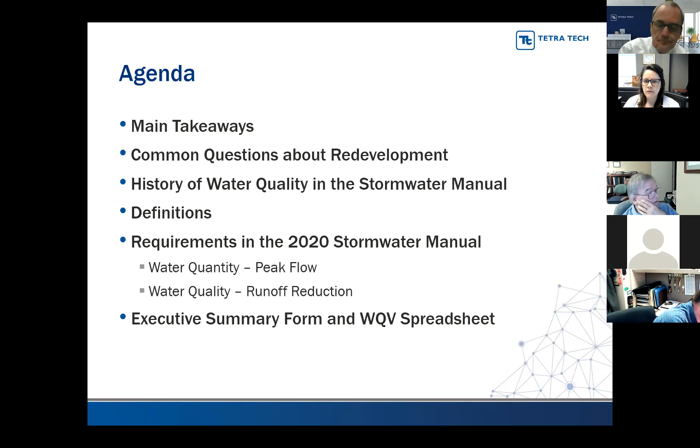From an overview regarding redevelopment in Fayette County, we typically have 20 to 30 projects annually. Half of them are usually less than an acre of disturbance. Many projects can meet the requirements by simply reducing the impervious area by 20%. The most common installed stormwater control is a manufactured treatment device. Approximately half of the projects are part of a larger common plan of development.

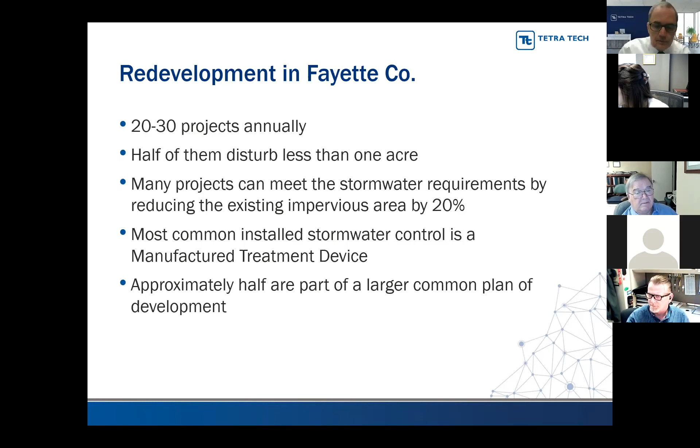So a couple of examples. This is Candlewood Suites on Waller Avenue, 2.6 acres of disturbance. They reduced impervious area by 6%. They didn't have to provide detention since the impervious area was reduced, and they installed a manufactured device to meet the water quality requirements.

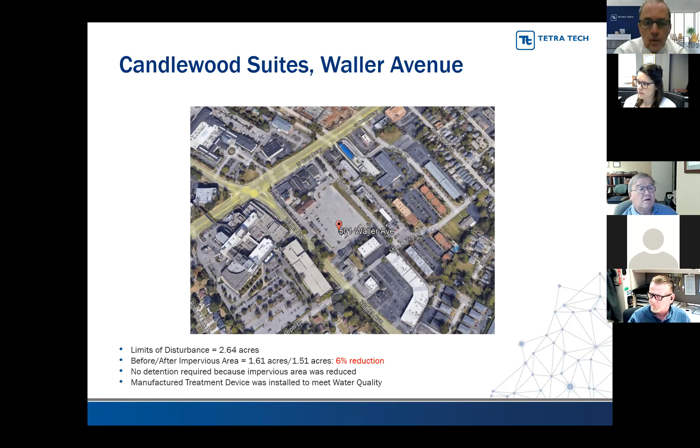Jiffy Lube on Meijer Way, part of a larger common plan of development, 0.9 acres of disturbance, so under that acre threshold that we'll talk about here in a minute. As part of that larger common plan of development back in the 90s, there was a detention basin put in on the other side of West Reynolds Road to control peak flow. So they didn't have to provide additional detention, but they did have to deal with water quality, and they did that by reducing impervious area by 23%.

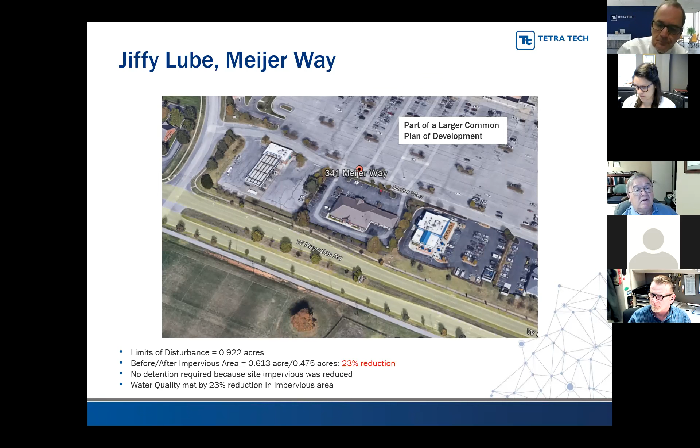So some of the common questions that have come up over the years: why does the city have water quantity and water quality requirements? I'm going to start with that one. We get this question a lot. Engineering gets that question a lot from engineers who are working from out of town.

The answer to that is really threefold. The first part is it's a requirement of the MS4 permit issued by the state of Kentucky that Lexington have requirements for water quality. Secondly, the consent decree required it. And thirdly, the citizens in the community expect it. So that's why we do it. Those requirements, many of them have been in place since 2001, so it's nothing new—it's been around a while.

These other questions will be answered as I go through my other slides. What is redevelopment? Does it apply to remodeling? What about sites less than an acre? Does it apply to water quantity? Are stormwater controls required if there is no increase in impervious area? There's a lot in the manual about water quality volume, runoff reduction, the 80th percentile and 90th percentile storms, so we'll talk about that. Item 9 is kind of a related thing, and we put it here because it comes up quite a bit regarding parking. And then, what is a common plan of development?

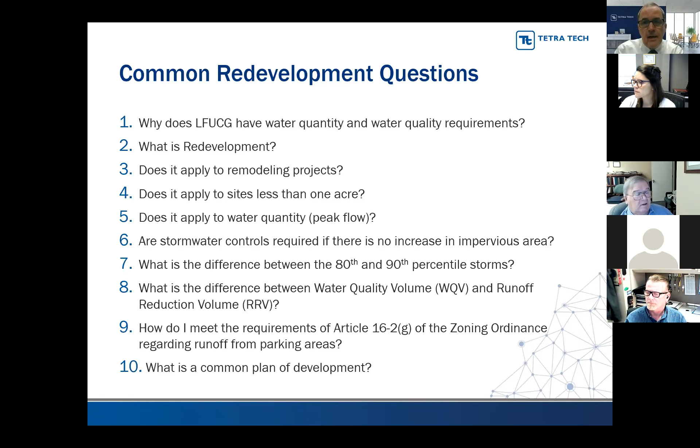So the main takeaways that I would like you to remember—if you remember nothing else from this presentation, I'd like you to remember this. There's a lot on this slide, so I'm going to spend just a minute on it. Stormwater standard for redevelopment. By the way, Abby, can people see my pointer?

Yes, they can. So water quality is for projects that disturb 1 acre or more of land, or that are part of a larger common plan of development. It's to control all runoff from new impervious areas—that is the same standard as new development. It's to control 20% of the runoff from existing impervious area, and the purpose of that is to achieve incremental improvement over time, and also to provide flexible standards that don't inhibit redevelopment.

And then with regard to peak flow, again, control all runoff from new impervious areas, and that is the same standard as new development. I also want to point out that engineering may require additional controls when there have been reports of flooding downstream.

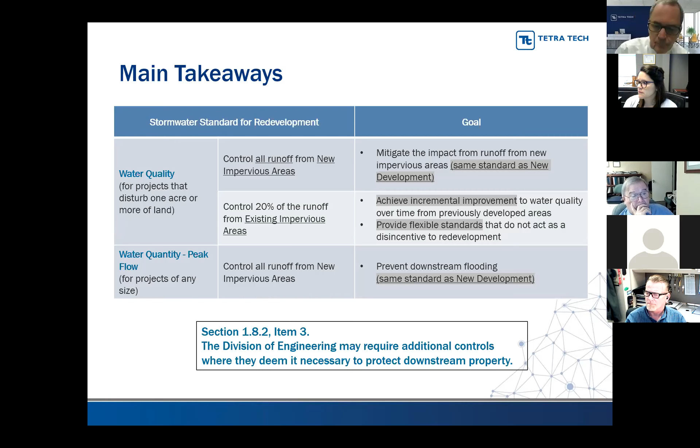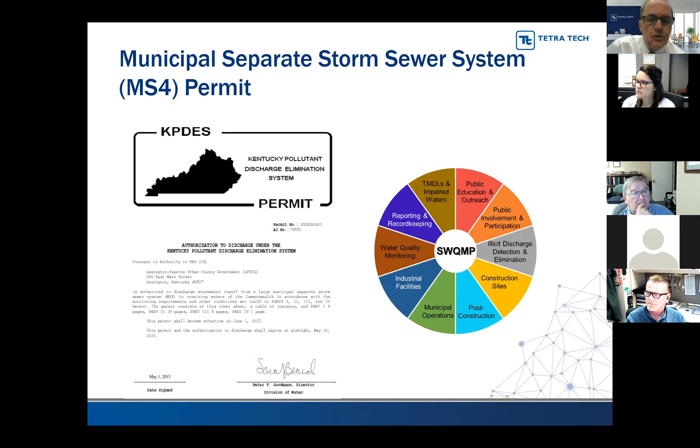As I mentioned earlier, new development and redevelopment requirements are part of the MS4 permit, the Municipal Separate Storm Sewer System. The permit was issued to Lexington in 2015, and requires the city to have a stormwater management program. I'll make the point that the Division of Water has noted in their response to comments that the city's post-construction standard is the same as other MS4s in Kentucky, and that the 80th percentile event, they deem it to be the maximum extent practicable for Kentucky.

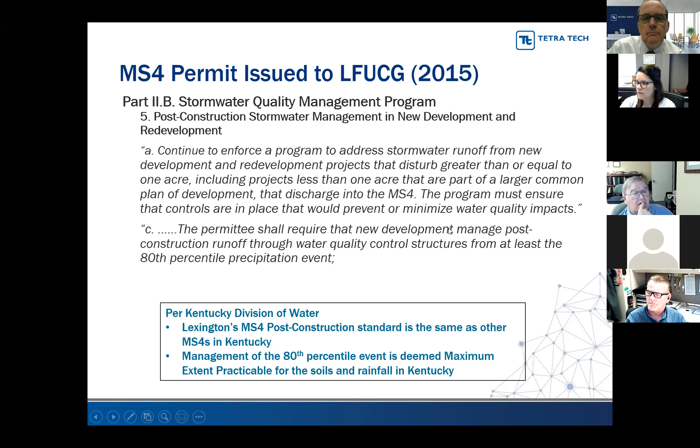So a little bit of history about water quality in the stormwater manual. The manual was adopted in 2001. In 2004, redevelopment standards were added, and really that's been the same ever since. In 2016, green infrastructure requirements were added to reduce the runoff volume.

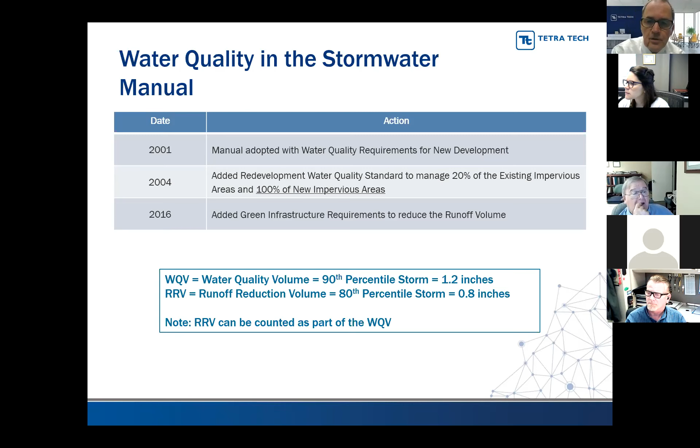At the bottom there, you can see information about the WQV and RRV. The 90th percentile storm is 1.2 inches. The 80th percentile is 0.8 inches. You may be wondering, where does that come from? We'll talk about that here in a minute.

So this chart is out of the stormwater manual, and it shows the requirements for new development on the left and redevelopment on the right. Just a few things to point out: the water quality volume is 1.2 inches, runoff reduction is 0.8 inches. And there is a requirement for channel protection to minimize stream bank erosion by providing detention for the 10-year, 6-hour storm.

And then for redevelopment, no detention is required if the impervious area is not increased, because there's no increase in peak flow. The requirement is to reduce baseline impervious area by 20% where possible. When they can't do that, provide other stormwater controls. And to emphasize the point, if there's a net increase in impervious area, the new development standards apply to that.

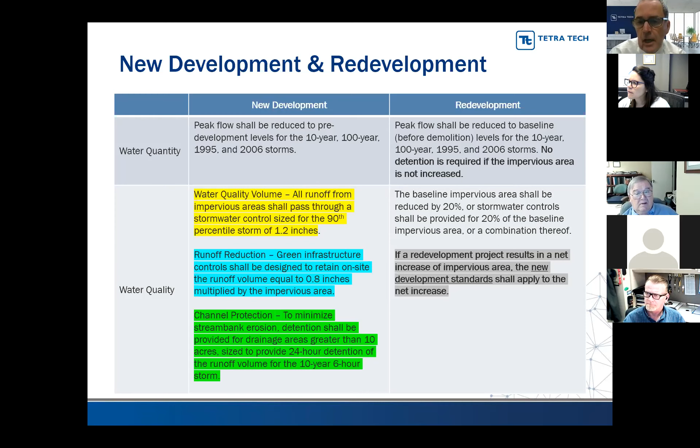So I'm not going to go into the next 3 slides in great detail, but this is out of the manual as well to show the typical applications depending on the date of original development.

So typically before 1974, there were no detention basins, no water quality controls. Then the requirement is to implement controls for both detention and for water quality.

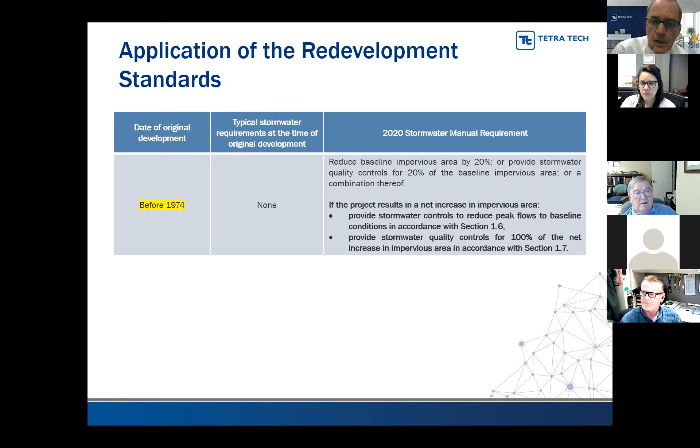Between 74 and 01, typically the only stormwater management facility was the detention basin. There are a few cases where there were some water quality controls, but it's primarily detention basins. So then the water quality requirements apply.

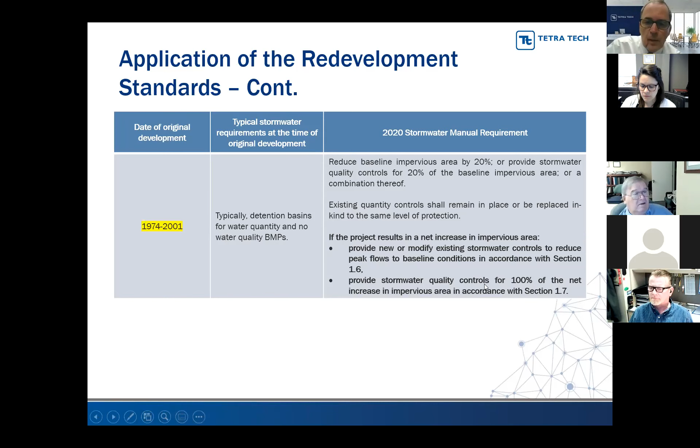And since 2001, we've had both detention and water quality controls.

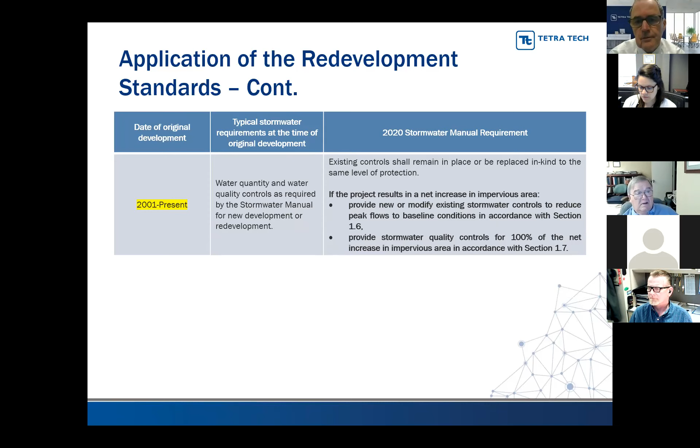So fundamentally, the requirements for redevelopment are to first manage 20% of the baseline impervious plus 100% of new impervious, and provide green infrastructure for new impervious areas to reduce the runoff volume.

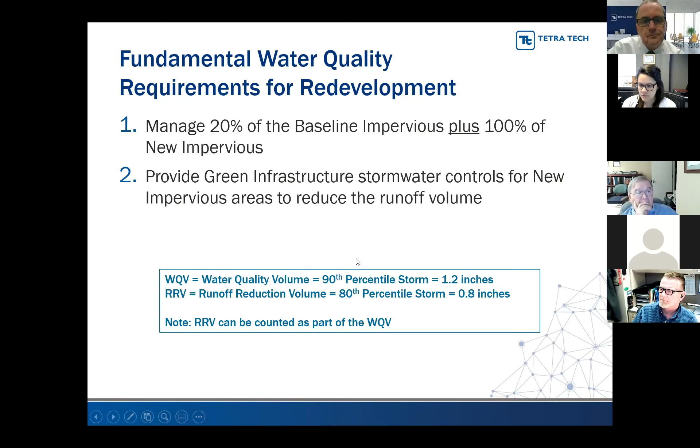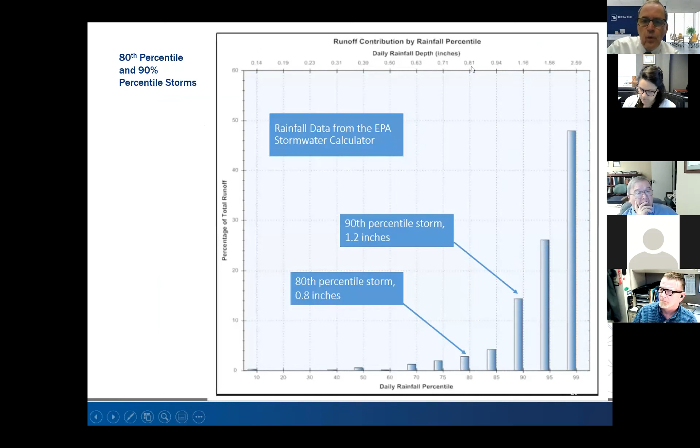Key definitions, again, this is out of the manual. We didn't come up with these, they are EPA definitions. Redevelopment is something that changes the footprint of a site, a disturbance equal to or greater than an acre. It does not include remodeling.

And then the larger common plan of development or sale is probably the most common topic of discussion. It's a lot of words there to define it, but it's not always clear cut. So there's a lot of discussion that goes on many times about whether a site is part of the larger common plan of development.

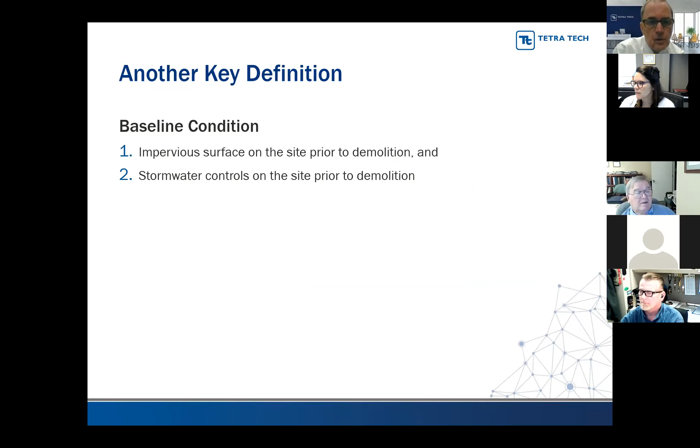Another key definition is the baseline condition, which is two things: the amount of impervious area on the site prior to demolition, and also the stormwater controls that are on the site. And there is the list of available stormwater controls listed in the manual.

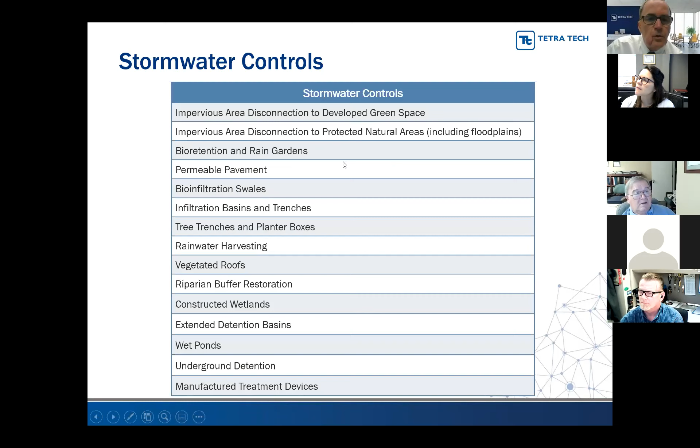In terms of the flexibility that a developer has, it's to first try to reduce baseline impervious by 20%. Secondly, provide BMPs for 20% of the baseline plus 100% of new impervious, or a combination of the above.

So there are several scenarios that you can see on a redevelopment project. The most common is that there's a decrease of impervious area somewhere between 0 and 20%. And then the developer has to provide additional controls for that remaining 20%.

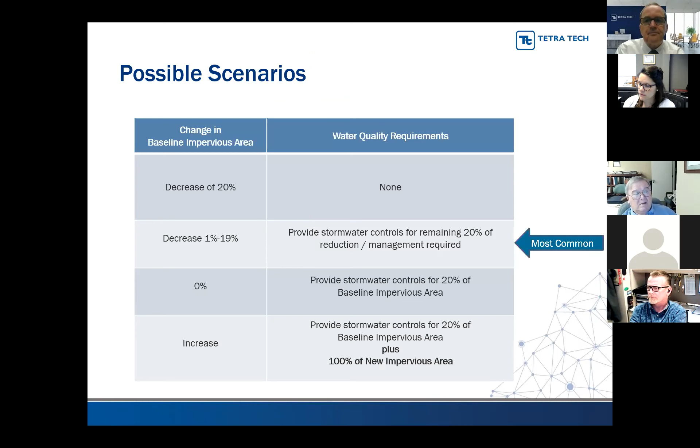Parking areas, I mentioned earlier, this is out of the zoning ordinance. Whenever there's a project that is adding 1,800 square feet or more of parking, there has to be a stormwater system in place to handle that additional flow. So engineering deals with that on a case-by-case basis.

Manufactured treatment devices, I mentioned that earlier. They can be used on new development and redevelopment when green infrastructure is not technically feasible. So what are some examples of that?

Many times in a redevelopment project, the infiltration rate of the soils is less than 0.5 inches per hour, so green infrastructure just doesn't work very well. That has to be demonstrated by a field test.

Sometimes there are elevation constraints. Subdrains cannot discharge to the surface, so green infrastructure that uses those will not work.

If the site is in the Royal Springs Aquifer, there's sometimes a concern about potential contamination due to an oil or gasoline spill. The geotechnical report may indicate a karst area, so green infrastructure is typically not a good idea in that case.

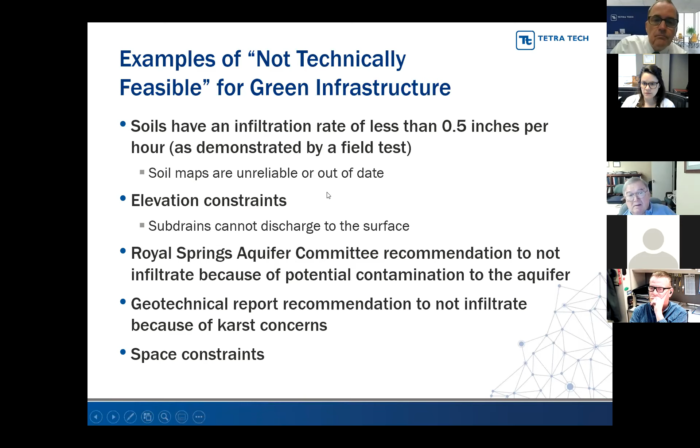So how are we doing on time here? 9:25, okay, so a few more slides here.

This is the executive summary form that the engineer fills out to demonstrate compliance with the things we've just talked about.

They also fill out a water quality volume spreadsheet. Here's a hypothetical example of adding 20,000 square feet of impervious surface. The spreadsheet calculates the water quality volume and also the runoff reduction volume.

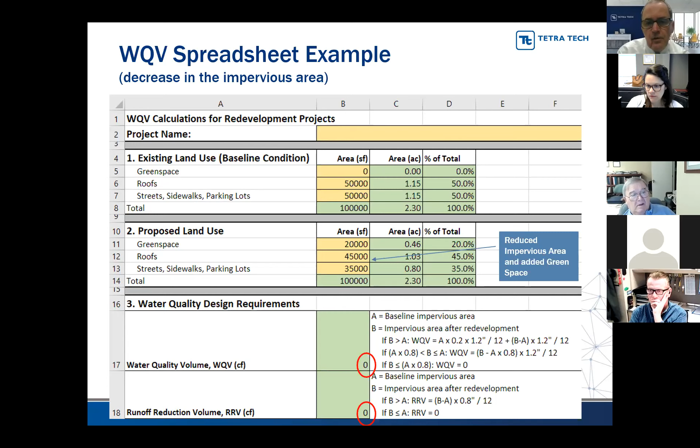And then another example where impervious area is being reduced by 20%. The spreadsheet again calculates the water quality volume as 0, and the runoff reduction volume is 0.

Okay, that finished up my part. Abby, what questions do we have? I don't see any in the chat yet, but feel free to unmute yourself. Richard has a 3-question rule, so let's help him meet his quota. Surely there's a question or two.

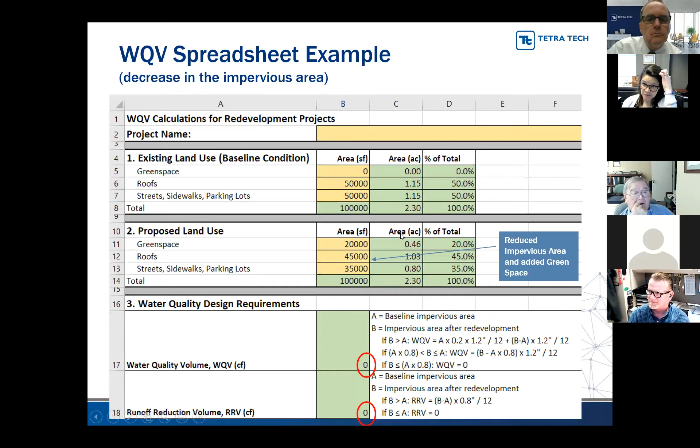Well, maybe not, maybe everybody's getting ready to go on spring break. Richard, can you expound a little bit on the slide where you were talking about a larger common plan of development? Maybe give an example - you had talked about it being a challenge, but I was curious how that's normally determined.

Well, sometimes it's - I think the confusion primarily depends on the original development of the property. For example, we mentioned Meijer, the Jiffy Lube there on Meijer Way, which is next to the Meijer store on Reynolds Road. That was done back in the 90s, before the manual was in effect. So typically that would be, and that is, a larger common plan of development. You had the big grocery store, you had the lots there with Jiffy Lube, a bank, a restaurant, and so forth.

But sometimes with things that are older or newer, it can become confusing about whether the outlots were really part of that larger common plan of development, or were just a single parcel that got sold for a specific purpose. Does that help?

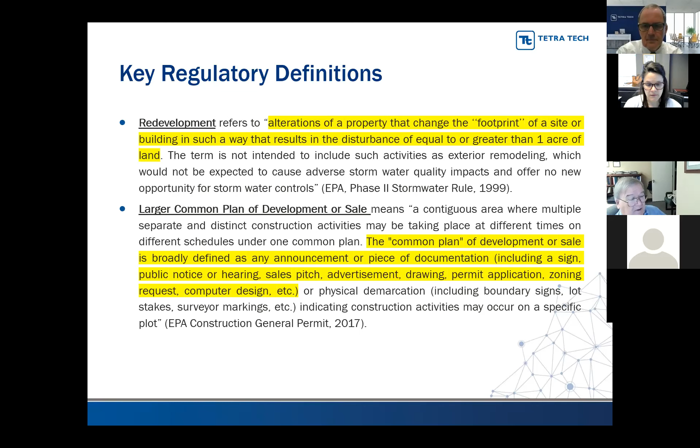I think the intent is commercial, but we see, especially with some of these mega homes that get built on lots that were previously not mega homes, you may actually see an impervious increase from that. That wasn't the intent - it's one of those things where it doesn't really have a spot, we're not sure where to put it yet. Richard, if that's what you're referring to here.

Richard: Yes, didn't this evolve out of discussions 20 years ago when all of the conversion of single family homes to student housing up around State Street, Elizabeth Street started going on - areas that had some drainage problems - and then all of a sudden you've got 8 college students living in a single family house, and they created some additional parking around them to accommodate their vehicles. I think that's where it came from, wasn't it? Yes, that's my understanding. It started because of UK, property around UK getting converted to student housing. Many times there was not an adequate storm sewer system in place to handle it, so it may have already been a problem to some degree, but that made it much worse. So that was the reason why this article was put in place.

Okay, thanks. Hey Richard, yes it's Fred. How you doing, by the way? Good. How are you? Great.

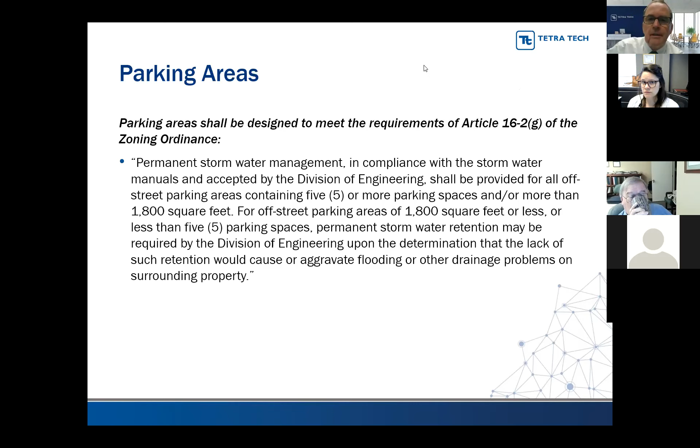All right, give me one second here. Do the old 'can you see my screen' question. Can you see my screen? We can, you'll probably want to do slideshow or presentation view. Yeah, I was just making sure I had the right side to start with. Yeah, there we go. I know you can see it because I can see it.

All right, so I'm Doug Burton, Director of Engineering. I think most of you know me. Sorry, I'm gonna interrupt you, can you switch sides, display settings, and then switch? Yep, yeah, that's what I was wondering. There we go. Perfect, I didn't have any notes there anyway. There you go. All right, so most of you know who I am.

So today what I wanted to focus on is, since it's redevelopment, often we see that being done by folks who maybe are new to the area. So we wanted to focus on the problems that we see—not to beat up on people, I feel like that's what this feels like sometimes, but it's just common little problems that cause delays in development, especially in redevelopment. If we can get ahead of these beforehand, it expedites the schedule, because we get calls all the time from developers or financiers saying, hey, what's the problem here? And we say, well, we're still waiting on X or Y or Z. So I wanted to cover some of those things today and help folks in the development community avoid those delays, because time is money.

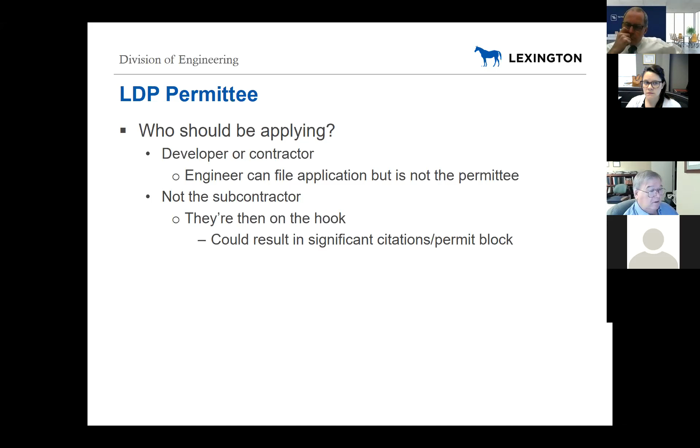Which can obviously get you citations and financial penalties, but also could get you permit blocked like they were before. So just make sure you're not working with someone who's trying to end around the system, because in the end we're probably going to find out, and it's just going to bite you in the butt.

We tried to make it a catch-all, but you can't catch everything, so we understand there's always going to be instances where there's something we missed. You may go through this entire thing and not get your question answered - fine, give us a call. But odds are most of your questions could get answered by simply walking through this process. If you find a massive hole in it, let us know and we can update it.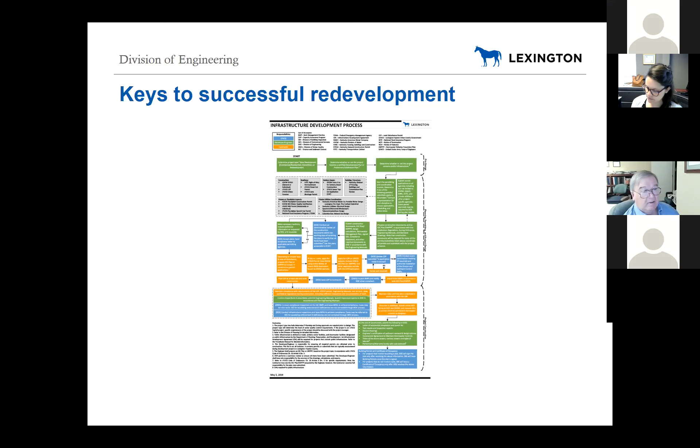Again, more keys to successful redevelopment: make sure you're turning everything in complete. That's probably one of the biggest things that creates delays - people not turning in forms, or turning in unsigned and undated forms that we've updated 2 or 3 cycles ago. We'll see forms that are 10 years old. And finally, probably one of the more important ones, make sure you fill out the executive summary accurately and completely, because that gives our reviewers a 10,000 foot view on everything you're doing, which can really expedite their review process.

Another thing that happens in the redevelopment sphere is people think, well, it's under an acre, I don't need a permit. Yeah, you do. You might not need an NOI, but you still need a permit from us. So keep that in mind if you have one of these smaller sites.

Next, erosion sediment control. One problem we've seen is that a lot of engineers have been doing work in this town for a long time, so they know how the process works. So they know if they notify us, we're just going to notify DWQ. So why don't we just skip a step and notify DWQ directly?

Well, the problem with that is twofold. First, it means the people who are controlling your permit, which is us, don't know where you're at in the steps. Also, it means you might be notifying the wrong person. If you're notifying one of the inspectors you've always worked with, they may not be the one assigned to this project.

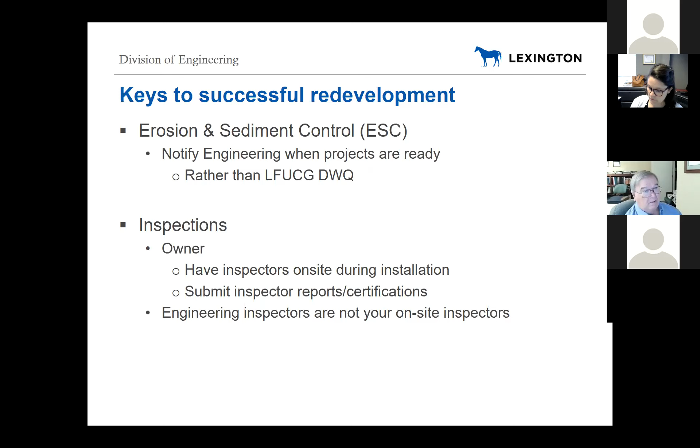Next, we'll move on to sureties. One problem we see here on surety creation is that we need to be there for that process. So get with Vaughn Atkins, who's our surety person, and she and one of the inspectors will do a walkthrough to make sure that both the engineers providing those surety calculations and us are on the same page.

And what that helps to do is avoid confusion when we're trying to remove items from the sureties later. So if you did something that we wouldn't have agreed with later, then it's just going to cause hassle. So make sure everybody's on the same page, do a walkthrough, make sure we're in agreement on that surety creation.

And then it just simplifies everything after that, especially when you consider some of those items may be 2, 5, 10 years down the road. If everybody's on the same page on day one, it's a lot easier than trying to remember what everybody was thinking 10 years later, 5 years later.

And then the one that causes some of the biggest issues is sanitary sewer issues. Get those fixed ASAP. Those have a 3-year inspection. So if 3 years down the road, you've already got the CO and there's people in, let's say, an apartment, and you've got some sort of major sanitary sewer issue under that parking lot, and it's found during one of that 3-year inspection cycle, you don't want to rip it up then because you already have people living there.

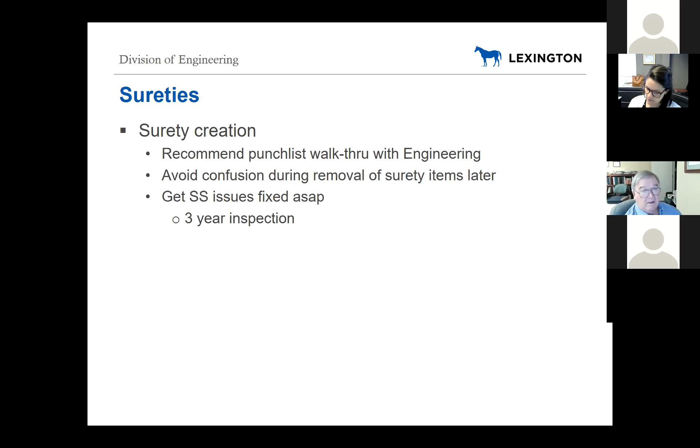So make sure that it gets fixed before you really occupy that. Next, maintenance agreement. This is one that for a lot of those, since it's redevelopment, then you may see sometimes. And again, examples of that are the basins, the underground storage, pavers, the manufactured treatment devices.

And what's the purpose of this maintenance agreement? It defines the inspection and the maintenance, basically what's to be done and when, and then who's responsible now and later, because obviously that changes. Who's responsible now is typically the developer. Who's responsible later is probably going to be the HOA or somebody to that effect.

So what we've seen is that isn't well defined maybe in the initial maintenance agreement, and then 5 years down the road, the HOA says, I didn't know I was supposed to do this. So if we get the maintenance agreement clear on what's going to be done and when, and who's responsible for that, it greatly simplifies things.

So how do we play a role in that? Well, engineering's role is that we're there on the front end, helping with the design and construction review and making sure it's in compliance with our standards and regulations. And then we turn it over, when it's complete, to DWQ, and they're there for the yearly inspection and regulation.

So one thing to keep in mind, that maintenance agreement form, the one that's online right now is a little out of date. It actually still has Jennifer Carey's information on there. We've updated it with Lindsay's information, but we haven't put that on the website yet because we're going to put some other updates up there as well.

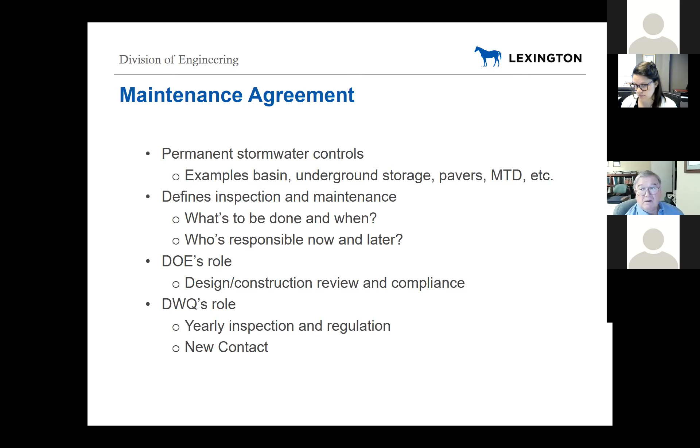So if you have one where you're going to need that, just reach out to us, Josh. More often than not, if you're doing redevelopment and you're doing one of these devices, it's probably commercial. So reach out to Josh Desarney, and he can provide that information. So with that, any questions?

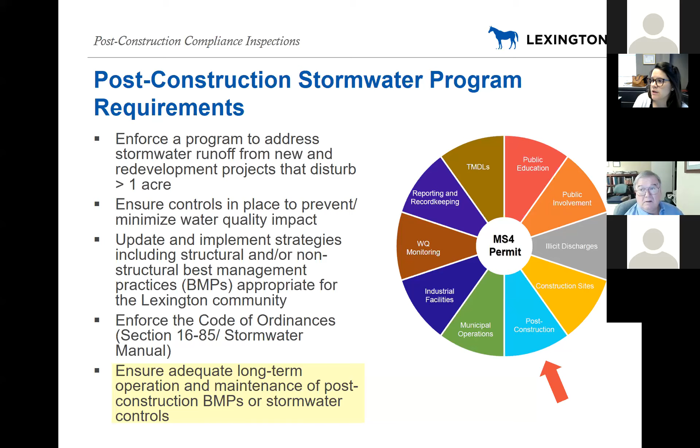So when we look at that requirement, what we're doing here and how do we do it? This slide's all about the how, you know, keeping an inventory of everything in the city. And we'll get into some numbers later, just so you have some background on that, maintaining procedures and checklists for how we're going to do compliance inspections of all these stormwater controls that have gone into the city.

Completing the inspections themselves, implementing repairs that fall under LFUCG's responsibility, implementing a program to ensure that private property owners conduct or arrange the repairs or maintenance that needs to be completed, having some sort of enforcement plan, our enforcement response plan that we follow for following up when repairs aren't completed or we need to escalate in some manner.

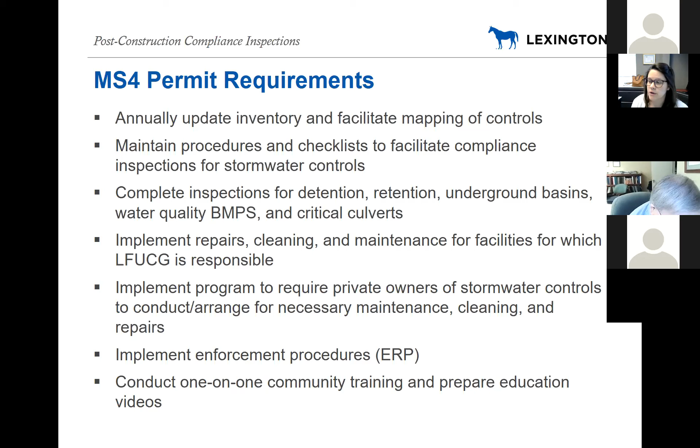And then also just doing one-on-one community training with folks as we go out and do the inspections, meeting with property owners where possible, trying to have that conversation first. And then we also prepare education videos each year, kind of bouncing back and forth between construction and post-construction. So we have a link to that later that I can pull up.

So when we're talking about stormwater controls or BMPs, Richard kind of mentioned this briefly, but there's the list of your stormwater controls in chapter 10 of the stormwater manual. For the most part, your stormwater controls are infrastructure designed or constructed to meet the water quality or water quantity requirements that Richard mentioned at the beginning.

So when you're talking redevelopment, it's that 20% reduction, and if you do that through pervious pavers, or if you don't hit the reduction and you're needing to install some sort of water quality or quantity device, then that's what we're talking about here.

And just a note on this: as you're in the design phase, one of the things to note that we deal with on the post-construction side of things is thinking about O&M and what those O&M requirements are during the design phase. So in particular, providing access, noting where the outfall is located and that it's not outfalling onto someone else's property without the proper controls, noting what's draining to it and how that may affect the BMP, or how it could inhibit pollutant removal, things like that.

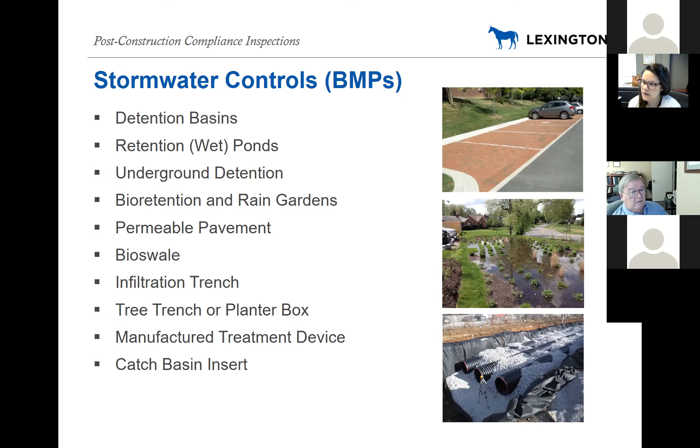So Doug mentioned the maintenance agreement and just some things on our end, and how that process and transition works. Once construction has reached substantial completion as defined in the procedures manual, then we, being the Division of Water Quality MS4 section, our inspectors will complete an inspection.

We'll get a list of those projects and we'll complete an inspection and ensure that that control is completed with no issues, that it appears to be functioning as designed. And at that point, we look and make sure we have this maintenance agreement.

We use it as a basis for our inspection, and this is filed with the BMP so that we have it for all future inspections and have the contact information, and what we need for the procedures or any sort of maintenance information that we would need. At that point, if it looks like it's functioning as designed and it's at substantial completion, then we'll add it to our inventory for long-term maintenance inspections. We'll get into how often those happen in a couple slides.

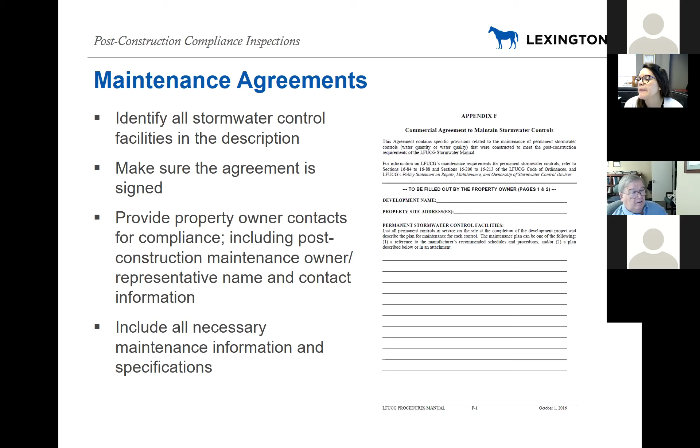So just some quick notes on the agreement itself. From our side of things, make sure you're identifying all of the stormwater controls on the maintenance agreement. Sometimes we see different ones missing and have to go back, and then engineering needs to go back to you and then back to us. So if you fully complete it and there's no issues, you avoid the back and forth. Make sure it's signed, provide the property owner contact for compliance, specifically the post-construction maintenance owner and representative name and contact info, so that if we have issues, we know who to contact. And then include all necessary maintenance information and specifications.

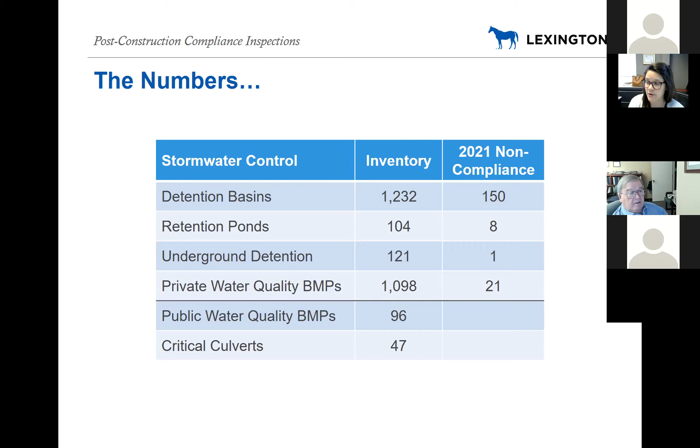And with private, it changes every year. With private water quality BMPs, we are already almost at 21 this year, and it's only the end of March, so it just changes year to year based on what kind of weather we've had, or that type of thing. So you'll see on this slide - we'll get into some of those common non-compliance issues at the end. I feel like I kind of skipped over that, but we'll have some time at the end to talk about what we're seeing out in the field.

So just to get an idea of what we're doing at Division of Water Quality within the post-construction realm: we've got our detention basins - we're out there inspecting all 1,232 of them twice a year, so we do 2 rounds of inspections. Retention ponds, we visit once a month. Underground detention is once a year from us, but we also require that those be inspected by a PE annually, and that report is to be submitted to us by January 31st. So if you do have underground detention planned in a redevelopment project or a project in general, just note that that's required for the future of that underground device.

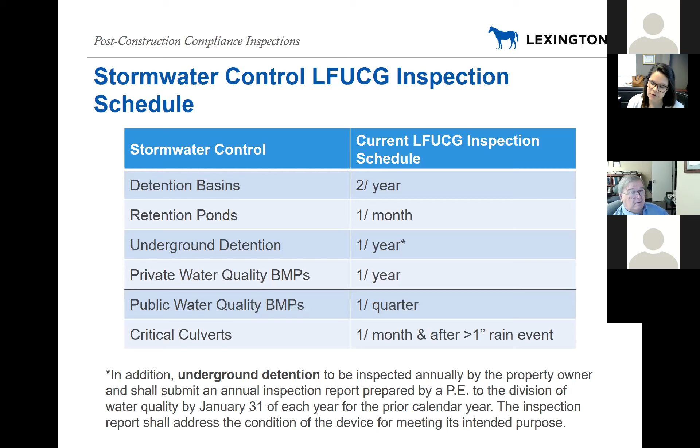And that comes from our Section 16 ordinance, which we'll talk about in a second. Private water quality BMPs, we visit those once a year - we've got about 1,098 right now in our inventory. Public BMPs, we do once a quarter, and critical culverts, we do once a month, and after more than an inch of rain. So those are just letting you know the things that we do in this office.

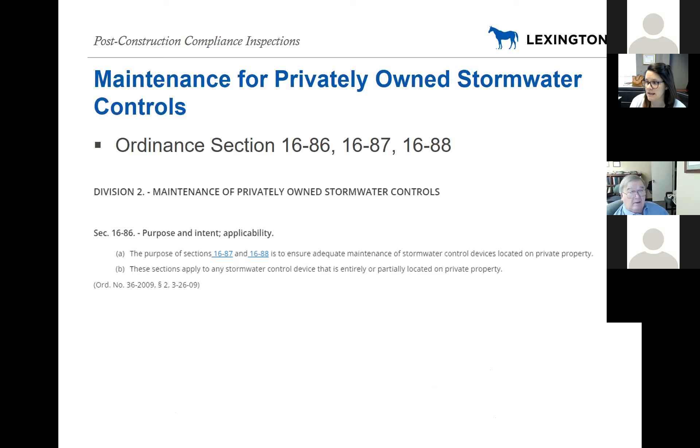All right, so where does a lot of the maintenance of these, where does that come from within our ordinances? You'll see it's mostly Section 16-86, 16-87, and 16-88. That's where we're talking about stormwater controls and ensuring adequate maintenance of them on private property. And 16-87 is where we're talking about residential areas. So how do we make that distinction between what's LFUCG and what's private property and responsibility?

Before I get into that, just really quickly - obviously with new development, we require that stormwater controls be located on a single parcel where the land use is either residential or commercial, it doesn't matter. So it's a single parcel, single ownership, and we know who's responsible for maintenance of that. But when you're in redevelopment or looking at older parts of the community, that's not always a clear line. So within the ordinance, if a public easement exists in residential areas, the private property owner, or hopefully usually an HOA, but not always, is responsible for the non-structural maintenance.

So you're looking at mowing, sodding and seeding bare areas, cleaning up and maintaining tree and shrub areas, and removal of accumulated debris, litter, tree limbs, all that kind of stuff.

Where there is a public easement, LFUCG is responsible for those structural repairs, looking at the integrity of embankments, structural things like concrete pipe, inlets, outlets, head walls, and severely eroded parts of the embankment. But where there is no public easement, the private property owner is responsible for non-structural and structural maintenance. So all this is spelled out in section 16 of our ordinance.

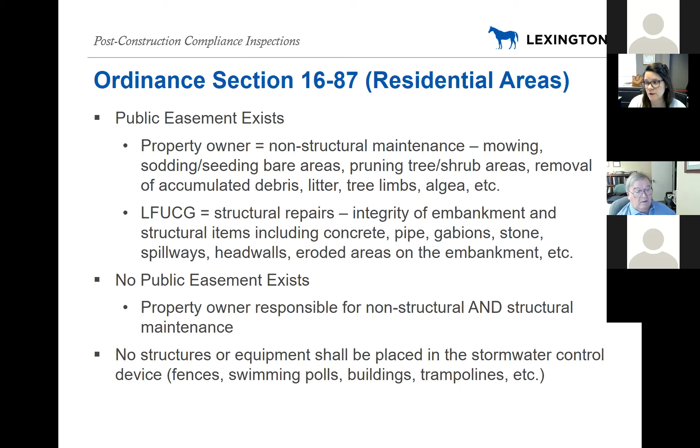That can be found on our website as well. One thing to note from this section that comes up quite often in our inspections: no structures or equipment shall be placed in the stormwater control. That's fences, swimming pools, buildings, playgrounds - something to keep in mind that we have to work with folks on pretty often. There are some other items in that ordinance as well, but those are just some of the key things.

When we're talking section 16-88, that's where we get into more commercial and industrial areas. In this situation, the ordinance spells out that maintenance is the responsibility of the property owner - structural and non-structural. They'll be notified in writing, and our inspection process is listed in that ordinance a little bit. We'll be visiting those once a year, or wherever it falls in the BMP detention basin realm underground.

You would be notified from us if maintenance is needed, but obviously underground systems would require an annual inspection on your end from the PE. And again, the big thing from that one: no structures or equipment placed in the control.

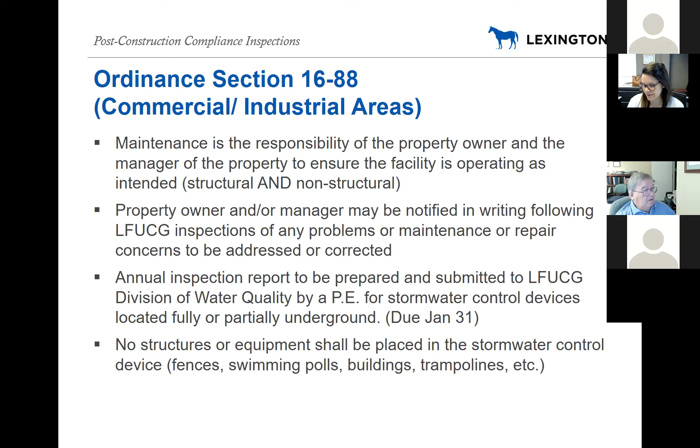Just one thing to note, I thought it might be helpful calling out generally what our expectation is of property owners when you're looking at these different BMPs or stormwater controls: inspecting them regularly - the big one - maintaining the control by removing litter and debris, mowing the grass, seeding unstabilized areas, a lot of that non-structural maintenance. If you keep up with it, making sure the path's clear, you avoid some of the bigger issues later on and potential NOVs from us as we go out and see these every so often.

A lot of these other things are items in the ordinance that I didn't call out on the previous slides: keeping trees off of dams or structures - probably less of a thing with redevelopment - but still not allowing structures to be built, preventing sediment or pollutant discharge into the control where possible, on-site management, and keeping files and maintenance plans so that you know what exists.

I don't know if this link will work, but we do LexTV, and I might have to share a new screen in order for you to see that pulled up. Let's see - is that the case? Do I need to reshare? Yeah, I only see the presentation slide. Okay, I'm just going to do that real quick so you can see, and then I'll pull up something.

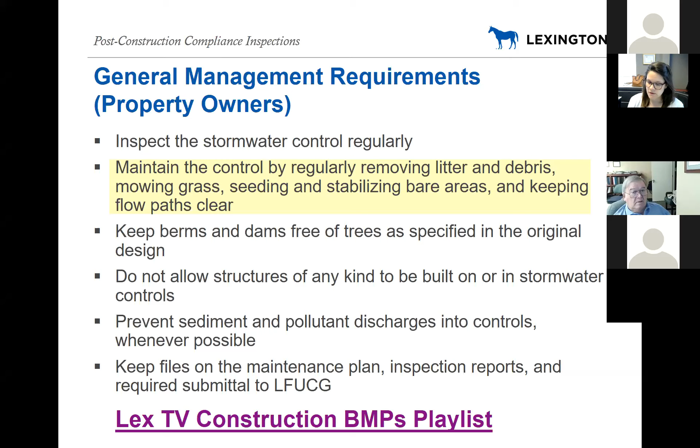All right, back to the presentation. So what do our inspections look like? I think I have time - I'm doing good. So, LFUCG inspection procedures.

Our inspectors complete site visits to the stormwater controls. They make on-site observations and fill out condition assessments. They look at any repair and maintenance needs, and if there are any violations noted during that inspection, then they'll follow the enforcement response plan, which we'll get into in a couple slides.

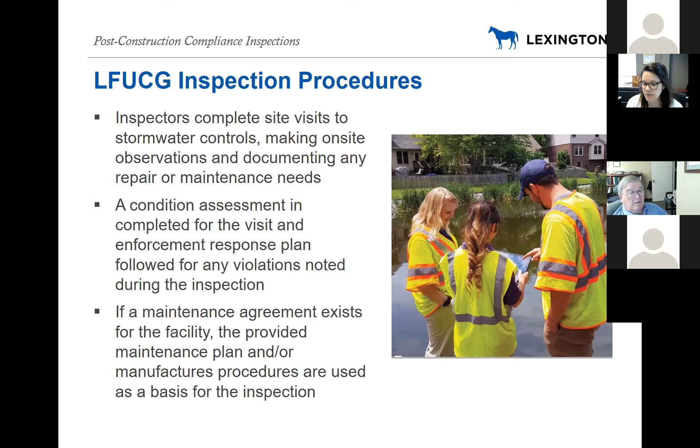If a maintenance agreement exists for that facility, that is used as a tool for the inspection - they're looking at the manufacturer's procedures for the device you provided, and any write-up for maintenance and information that you provided in that agreement. So that's where the importance of that agreement and the required maintenance for the things installed on the site come in handy.

When they're out on inspections, the big things they're looking at depend on the control, and that's going to vary based on that long list of stormwater controls from the beginning. But the big things our inspectors are looking at are upstream areas that drain to the BMP, making sure nothing is entering the inlet that can affect the BMP's performance.

They check the physical components of the BMP, making sure berms, banks, and pieces and parts—concrete, metal, plastic—aren't broken or missing or falling apart, and that they're functional and intact. They also look for extraneous structures, like pools, playgrounds, and other things found where they shouldn't be.

They're looking at vegetation—is it covered with the appropriate vegetation for the maintenance plan? If it's supposed to be grass, is it mowed or managed properly? If it's more of a green infrastructure, does it seem to have the right plants in it per the maintenance plan provided?

Then flow path is a big one that we see on a lot of inspections or NOVs we send out—making sure the flow path is clear, that water can drain through the BMP without a problem, whether that's the swale or an inlet filter that's clogged. Making sure that flow path is clear.

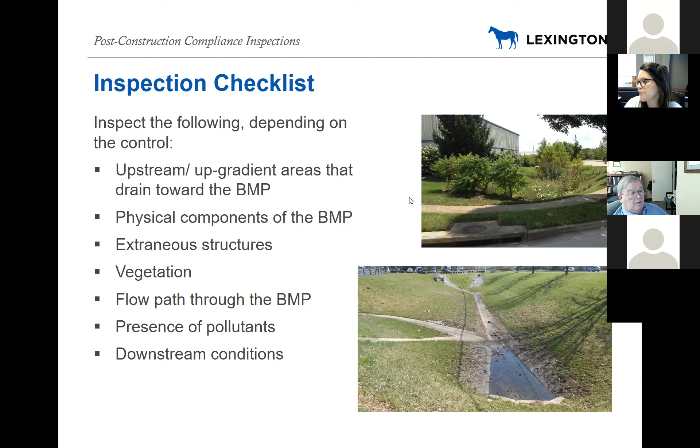So what does the enforcement response plan look like? If a violation exists or they note some non-compliance with the BMP or stormwater control, on-site education and discussion is preferred where possible.

A lot of times, if we can't get a hold of the property owner, it's easier to just send the first NOV, but we have the option of sending a warning letter or informal notice. The NOV has been a useful tool in getting information to the right people about what they need to do, so they reach out and contact us.

We will send up to 2 NOVs before submitting it for enforcement escalation to the Division of Environmental Services, and that's where you get into more citations and fines.

On our end, you'd be looking at a notice of violation stating what needs to happen. We give you 14 days, and then we'll go do a follow-up inspection.

If we haven't heard from you or haven't seen that any work has been completed, we'll send a second notice of violation, following that same procedure and trying to reach out. And if we get nowhere with that, we ramp it up a little and go to DES to try to get something done and improved on the site.

Inspectors conduct follow-up inspections where violations are noted. Within the NOV, we state the nature of the violation or issue, what needs to be done to address it, the deadline, and our next steps, so that all the information is in there when we send it.

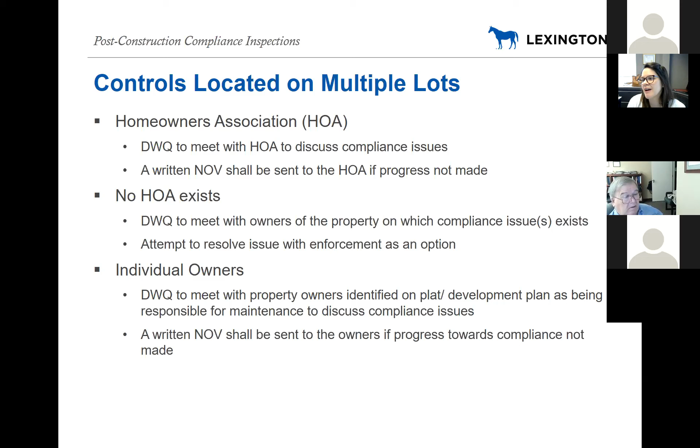So again, trying to deal with an unideal situation, but working with the property owner the best we can to get towards compliance so that we're treating water quality or detaining the water where it needs to be in order to make our systems function and do what's needed to improve water quality and quantity.

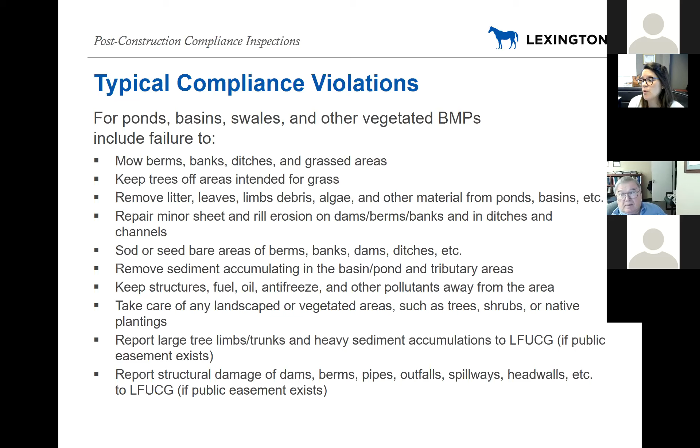So just some typical compliance violations for ponds. There's a lot there, but for this one, especially when we're looking at ponds, basins, swales, other vegetated BMPs, we oftentimes will see a failure to mow or remove litter, debris, limbs, a lot of accumulated sediment. Those will be a lot of things, minor erosion, having to note that these need to be seeded or sod if there's bare areas, keeping that flow path clear are big ones, taking care of the vegetation, whether it's a landscaped area or is supposed to be vegetated with certain types of plantings. These are all things we'll try to note.

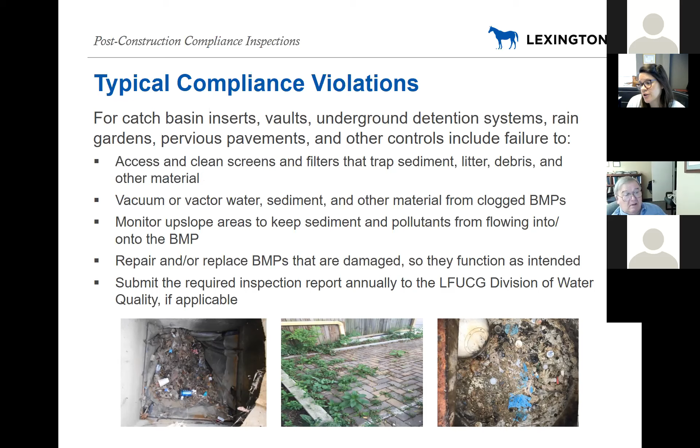And then obviously typical compliance violations for things like catch basin inserts, vaults, underground detention, rain gardens, pervious pavers. You're looking at getting access to them can sometimes be an issue. Cleaning the screens, obviously that's a big one because those fill up. So those will be notes, a lot of the times violations that we'll see, and just remind the property owner that those need to be cleared, vac the device out, clean it out. Monitoring upslope conditions, repair if the BMP itself is damaged. That's another big one that we'll note. Or failure to submit the required inspection reports for underground detention. That's another one that we'll see often.

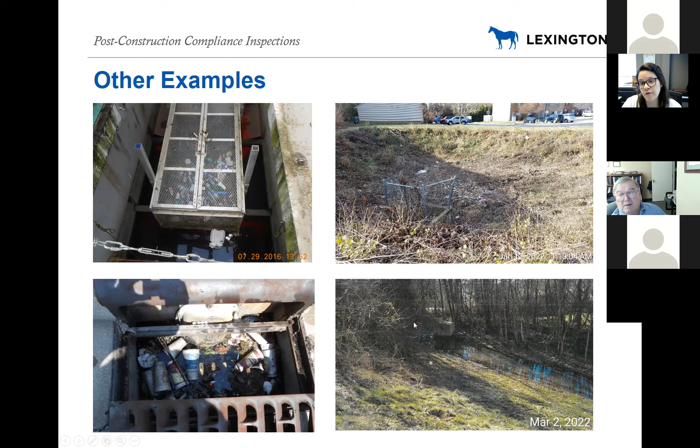So I've just included some pictures throughout the years of just different things where obviously these need to be cleaned out or vacked, or the litter needs to be removed, or in the bottom right corner, sediment was blocking and that needed to be cleaned out, and to help with the flow path and get water flowing again through that BMP. So I feel like I kind of went quick there at the end, but felt like I was talking too long.

So that's good. But that's all I have. If you have questions, I'm happy to answer them. Hopefully that was helpful just to see the inside of what we do at Division of Water Quality and within the MS4 post-construction realm.

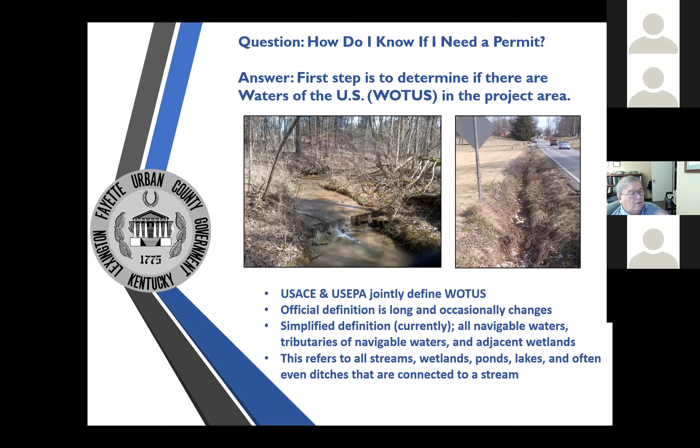You need to have a lot of time if you're going to wait for them to do it, however. According to the Louisville District website, they ask that you go ahead and obtain the services of an environmental consultant who's experienced with identification and delineation of waters of the US. That way you have your evaluation done up front, you submit it to the Corps of Engineers, and then they can approve the jurisdictional determination that you submit to them. So this shows that sometimes you need the help of a professional to identify waters of the US and determine if you need a permit.

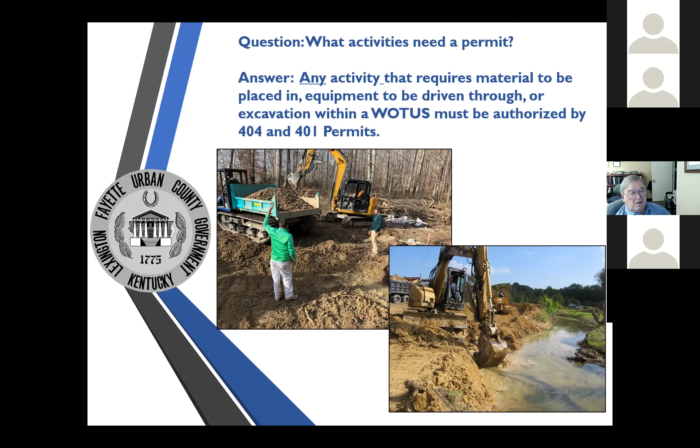So what types of permits are typically needed? When in Kentucky, you get 3 authorization letters from 2 different agencies. The US ACE application for Department of the Army permit is known as the 404 permit. You have to get a permit from the Corps of Engineers. Most of Kentucky is in the Louisville district, and that's who you submit your application to.

You also have to get a 401 water quality certification permit from Division of Water. And in most cases, a permit to construct across or along a stream from Division of Water, known as the floodplain permit. Another point to note is that the 401 water quality certification from the Division of Water must be authorized before the Corps can authorize a 404 permit.

So these permits sort of go hand in hand, and we typically submit applications at the same time to both agencies. Normally the project manager at the Corps of Engineers will discuss the project with the project manager at Division of Water, and they jointly go through their review process.

A permit we use most frequently is the nationwide permit. That's a general form of permit that authorizes activities all across the country. There are 59 separate nationwide permits for various activities at this time. There's a nationwide permit for residential developments, one for commercial developments, one for utility lines, stormwater management, linear transportation projects, and so on. So there's 59 different activities that have their own separate nationwide permit.

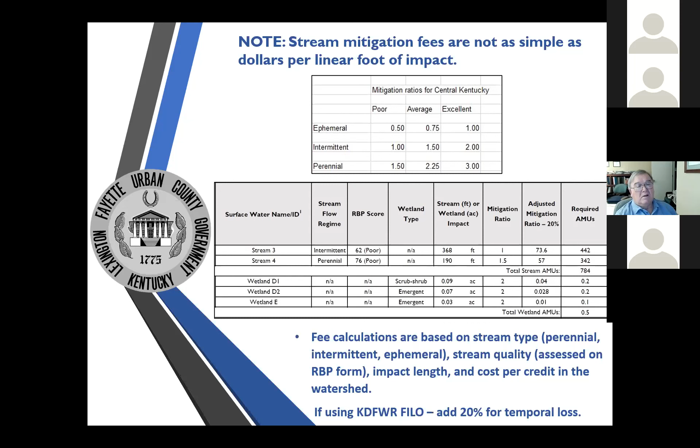Another big question for permits is what about impacting habitat for endangered bats if you have to cut down trees? In Kentucky, all trees are habitat for federally protected bat species, like the Indiana bat and the northern long-eared bat. So before the Corps can authorize your project for a nationwide permit or a general permit, they have to document that Section 7 has been handled.

You either have to show that you don't have any bats in your trees, which requires a survey—you have to hire a biologist to go catch bats and track them to their tree—or you can make a contribution to the Imperiled Bat Conservation Fund to compensate for the tree removal.

You can send them a check that has your Corps ID number on it, and they will return a receipt, and you forward that to your Corps permit reviewer, and they are able to check the box for Section 7 consultation. Bats are really the most common species that'll be listed for, especially in Fayette County.

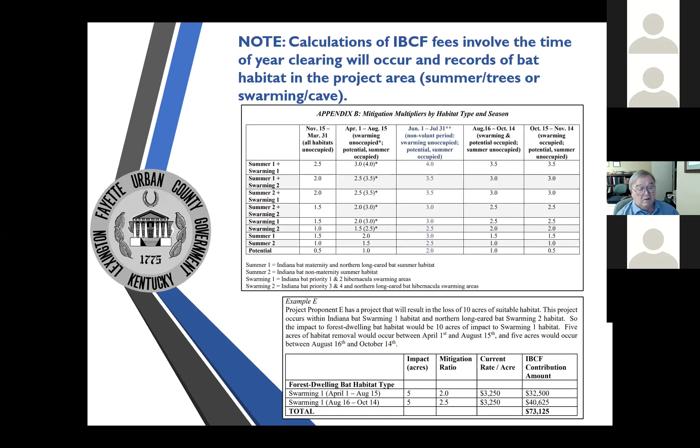The big thing that's critical are site plans with the limits of disturbance clearly defined. So your project doesn't have to be at 100% design in order to apply for permit applications, but it's important that your limits of disturbance are not going to change. We like to wait, if we can get 60% design plans, that's usually a good point to apply for permits. You know that the boundaries aren't going to change, and most of the changes at that point are to other structures besides the site plan.

If you have your Waters of the U.S. delineation report and your JD, that definitely needs to go with your application, and a table that shows all your impacts to the waters of the U.S. So you list your streams and your wetlands, you list how many feet of stream impact and how many acres of wetland impact. And if you exceed those limits of 300 feet of stream or a tenth of an acre of wetland, then you need to include a mitigation statement that says here's how we're going to deal with our mitigation. We're going to buy credits from this bank or use the in-lieu fee program, or if you happen to be in a watershed where there's no available credits, you can still do on-site or permittee responsible mitigation.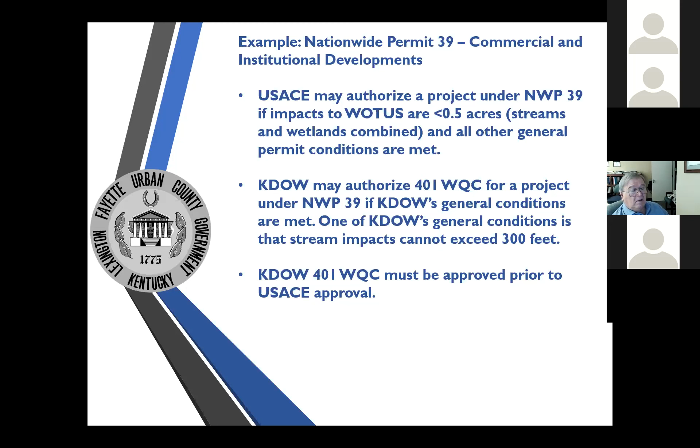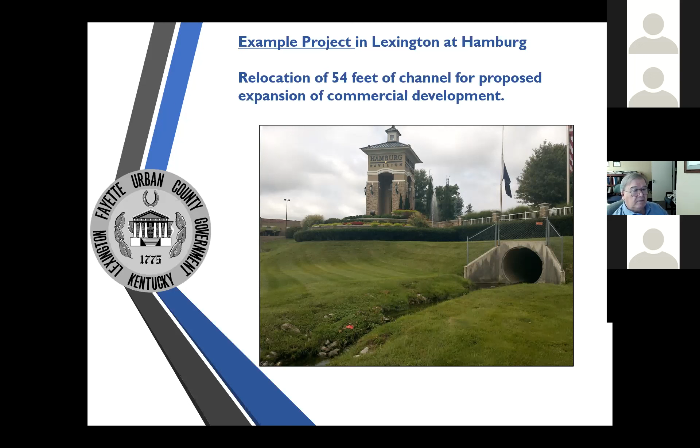So this is a project that we worked on a couple of years ago. I think it fits pretty well with redevelopment. It was over in the Hamburg area. An expansion of an existing commercial development was proposed, and they wanted to move this head wall and this stormwater channel. And I think somebody from the city looked at the plans and said, you probably need to make sure you don't need a permit for this because maybe that's a stream. So this is the channel in question.

And the first question we had to ask was, is it waters of the US? We knew from historic photos that there wasn't a channel in this place originally before this area was developed, but the hydrology of that whole site's been changed. And there's water flowing from this pipe a lot of the time. There's an ordinary high water mark. There's substrate sorting. There's a community of aquatic organisms and algae, and most of the organisms that were in this stream are very pollution tolerant, which probably indicates that this water quality is not great, but they also indicate that they're able to support most of their life cycle in that channel.

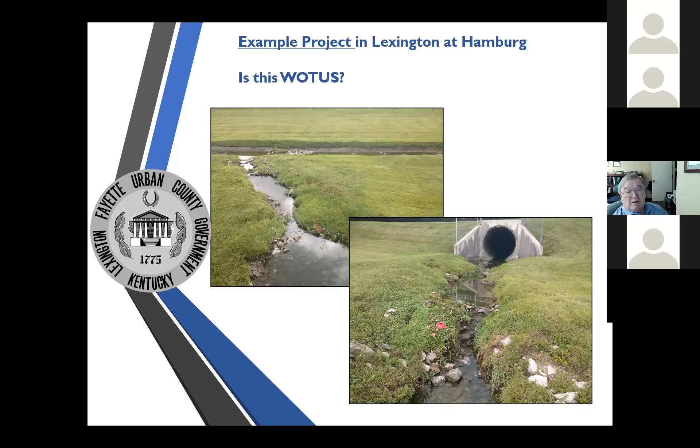We got notice to proceed from our client at the end of August, and we went out for our site assessment, put together a Waters of the US delineation report, and got that back to the client in the first part of September.

They decided to go ahead and proceed with the jurisdictional determination request to the Corps of Engineers, so we submitted that the first part of October. By the end of November, we'd received the signed JD back from the Corps saying yes, this is waters of the US.

And if you're going to impact it, you need authorization. So after discussion with the client about how to proceed, including whether they could change the design to avoid the impact, which there wasn't a way to do, we initiated coordination with SHPO and did the IPAC consultation with the U.S. Fish and Wildlife Service, and got a list back saying you have to consider bats in this part of the world.

We got all that taken care of, did little memos for each, looked at historic photos, and provided SHPO with documentation to prove that area had been disturbed in the past, so there were unlikely to be any historic resources there. Also there were no trees of a size and quality for bat habitat.